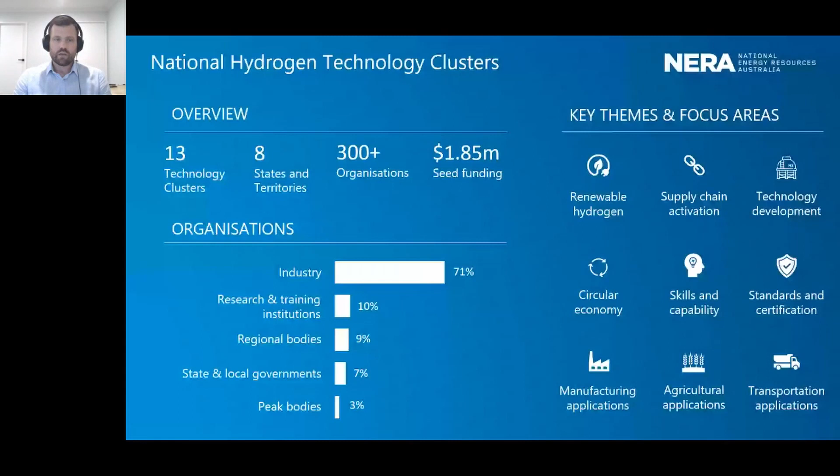So I touched on before some of the people that are here. For people not across the Australian value proposition, you've got Bell Bay right down in the south in Tasmania - fantastic hydro assets there with wind, a great deep port that already has a smelter as a potential off-taker, plus great resources, capability, and training and educational services down in Bell Bay.

Moving up to Victoria, you've got Gippsland, a $500 million blue hydrogen pilot project, which is fantastic and has really been the driver to create the world's first ever liquefied hydrogen vessel. And you keep moving up through Australia - I won't go through all of them, unfortunately don't have enough time today.

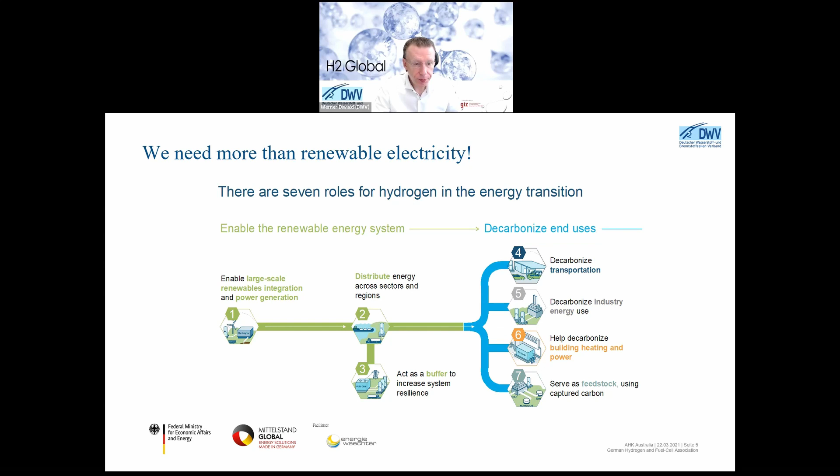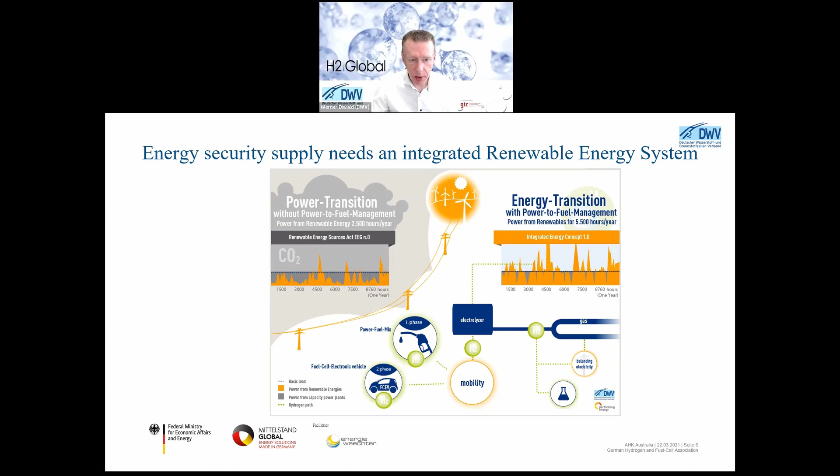It works very easily if we over-install renewable energy production from the electricity side. Then we have very many hours in the year with electricity production directly from renewable energies. We see it on the right side, the integrated energy concept. But on the other side, we have a lot of surplus energy, and we can waste it. We can stop or reduce the turbines and solar production in these hours, or we can use this energy to produce hydrogen, and then transfer it, for example, to the mobility sector and also other industries.

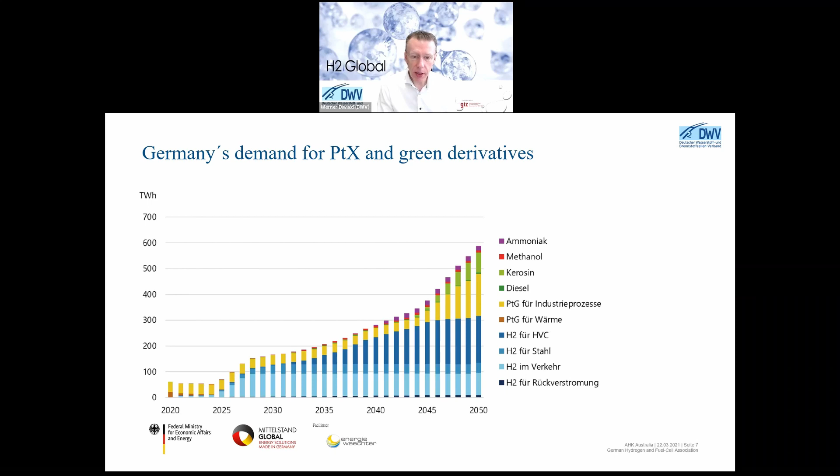I think that was the basic figures, more and more visible and communicated by the industry to the politicians. I think that was really the base for the decision to make a German national hydrogen strategy two years ago. For the political scene, it's not only a small solution to integrate the renewables, it's more the solution to decarbonize our whole energy system over all branches. On the other side, it's a big chance for our economy. So we need a long-term strategy, supported by politics, so that industry actors can act now.

The National Hydrogen Strategy, NWS, Nationale Wasserstoffstrategie, defines the steps necessary to contribute to achieving the climate targets, to create a new value chain for the German economy, and to further develop international energy policy. The government will support this transformation, or market ramp up, with 9 billion euros. And they defined 13 concrete objectives and 38 coordinated measures, which we want to bring to market or realize in the next 10 years.

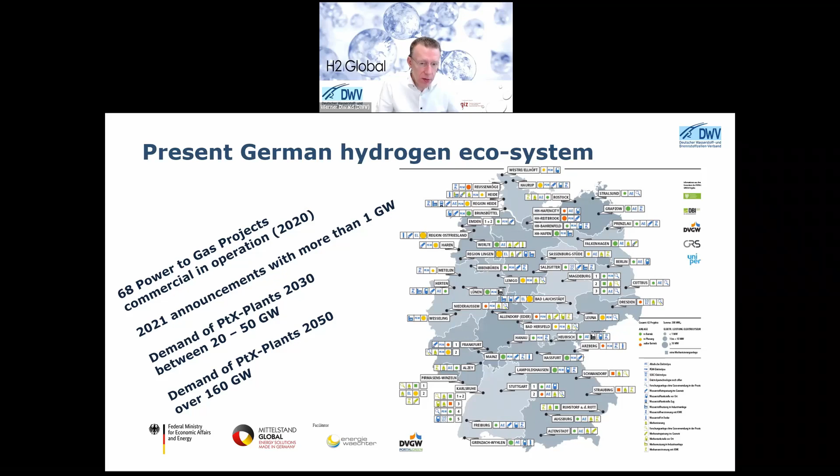Demand for PTX plants in 2030, I mentioned, is a minimum of 20 gigawatts. There are some studies on the market based on realistic numbers that mention 50 gigawatts, and the demand for 2050 for Germany is more than 160 gigawatts. That's only for Germany, and if you take a look at the whole world, it's really an amazing market opportunity for the industry to produce electrolyzers, PTX utilities, and so on.

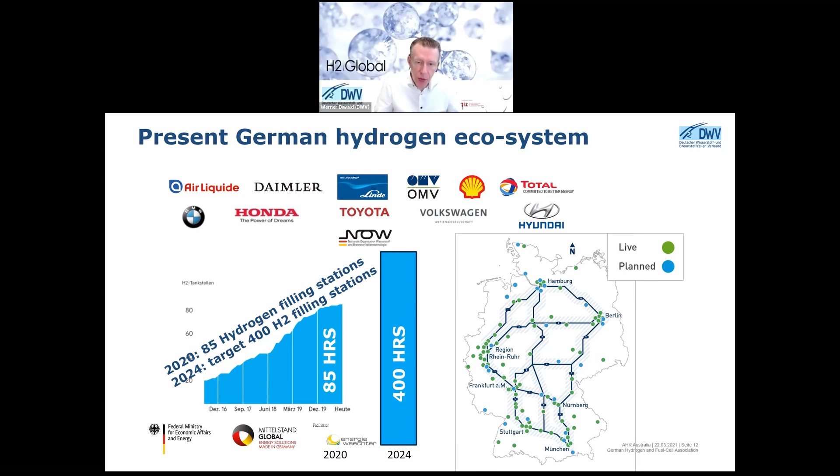Until now we have 85 hydrogen filling stations. The target for 2024 is 400 hydrogen filling stations. With these 85 stations, positioned very intelligently, we already have the possibility to drive a fuel cell car through Germany from east to west, from south to north—no problem. Of course it's not very comfortable at the moment, but it's possible. I think that's the very positive message: it's realistic to drive with hydrogen cars, and soon hydrogen trucks, through Germany without any emissions in the coming years.

You see here over Germany where the mobility station situation is, where the filling stations are, and what we see now is really the concentration on trucks, on heavy duty trucks which operate with hydrogen and fuel cells. I think it's more the market than for passenger cars.

For the first steps, I think it works with battery cars. But if you see long distance running for cars, or heavy duty, it's only really possible with hydrogen. And I think that is a reason why the big truck companies are now really concentrated on hydrogen with the truck business production.

You see buses are produced in Germany also. Toyota delivers a lot of cars to Germany also. So we really see there is a small, but there is a hydrogen fuel cell mobility acting with a lot of people. So, as I mentioned, you see a little bit again here where the projects are placed. It's not concentrated on one area, it's everywhere in Germany.

Everybody has interest to install power-to-gas units, to integrate especially the renewable energies, so wind and PV on one side, and on the other side they see that at the latest in 2030 they need a lot of clean hydrogen to fulfill the climate targets without payments of penalties.

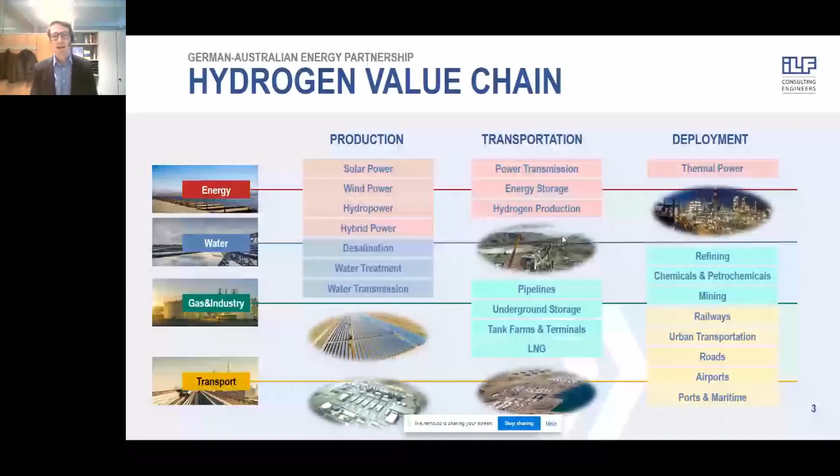Coming to some projects we have worked on and are currently working on: starting with a pilot plant, the sector is still in the pilot plant phase, up to around 10 megawatts, with several facilities operating — Werner mentioned this earlier. So we're working on a 4 megawatt project in Austria, which is currently under construction.

Being commissioned by end of the year. We have significant experience in gas transportation in the past. One example is power to gas, working on a 100 megawatt facility in Germany, and just recently got another order to produce on a 100 megawatt industrial scale, hydrogen, and maybe together with methanation, injecting it into the pipeline system.

So in Europe we discussed this quite intensively: how do the compressor stations react? How can pipelines be converted even to hydrogen pipelines?

A very interesting topic, also for the relationship between Australia and Germany, is the transportation of hydrogen over long distances. We studied this already for the steel industry in Europe, to get hydrogen from the Middle East, a couple of thousand kilometers away. Since we already have an intensive relationship on the energy side between Australia and Germany, we are optimistic there will be ways in the future, already being discussed now, to transport hydrogen from Australia to Germany, for instance.

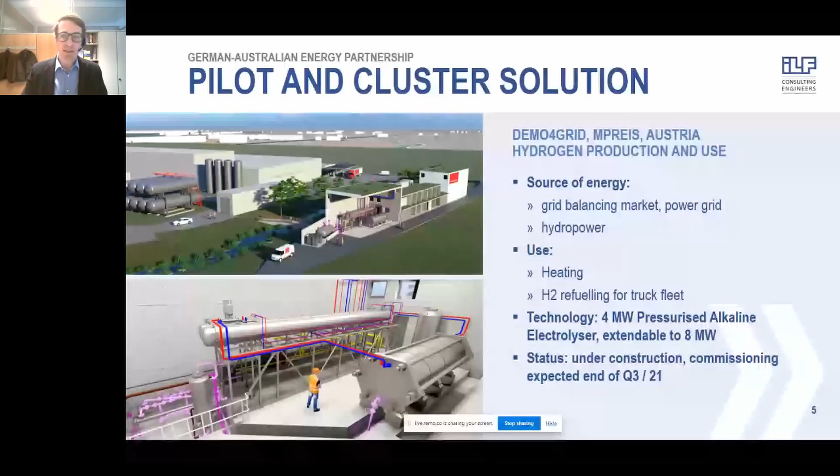I skipped that a little bit, it's just for your information. I will share my presentation right after in the chat if it works, otherwise I can send it to you later, or you will find it as Max mentioned before. So I think that's from my side. Thank you very much for giving me the opportunity to talk to you, and I hope we will together design the energy partnership in future. Thank you very much.

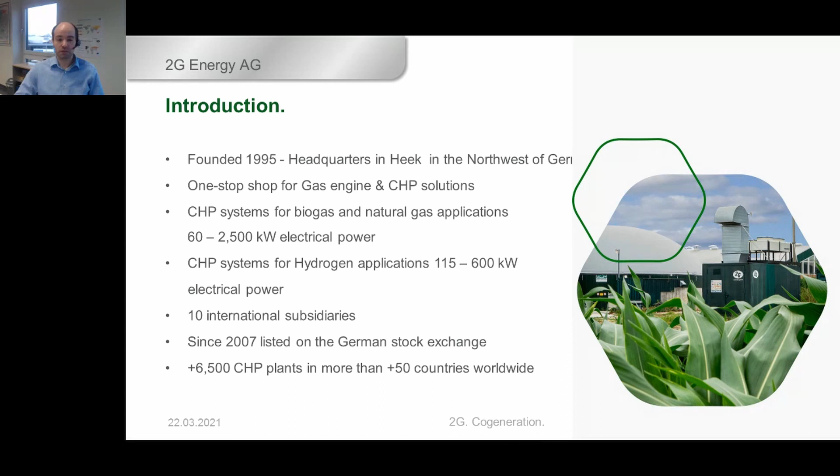Perfect, wonderful. Good morning everyone, or good afternoon to Australia. Nice to meet every one of you. I'll have the brief opportunity to talk about 2G Energy and our hydrogen solutions for gas engine-driven cogeneration applications. A few brief comments about our company: 2G was founded in 1995. Our company headquarters is located in the northwest of Germany, North Rhine-Westphalia. Our company is what we call a one-stop shop for gas engine and CHP applications. Our usual power range goes from 60 kilowatt electrical to 2,500 kilowatt electrical, for biogas and natural gas.

Two years ago, we also introduced our own line of gas engine-based applications for hydrogen operation in the power range between 115 and 600 kilowatt electrical output, with a 750 kilowatt unit just being introduced to the market at the moment, but I'll get to that a little bit later.

2G is a stock-listed company. Back in 2007, we went public on the Frankfurt Stock Exchange in Germany. Nowadays we're almost 700 employees in the company, with last year's turnover roughly being 250 million euro. Up till this date, 2G has supplied roughly 6,500 cogeneration systems on various gas types to more than 50 countries, including Australia, but about that I'll get to it in a minute.

So 2G, in its core, we are a CHP system and engine manufacturer with our own manufacturing facilities and also our own R&D division, which we believe sets us apart a little bit from other players in the field, because our company is fully dedicated to these application types, also for various gas types, such as natural gas, biogas, propane, and of course hydrogen, with our own engine series from 60 kilowatt up to 1 megawatt. What I mean with R&D is really not modifying existing engine technologies, not retrofitting other brands or manufacturers. What we're talking about is 100% genuine OEM capability in this segment.

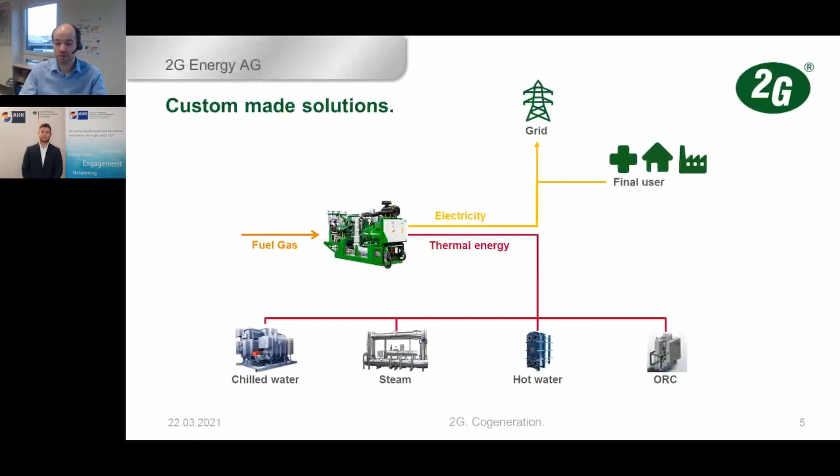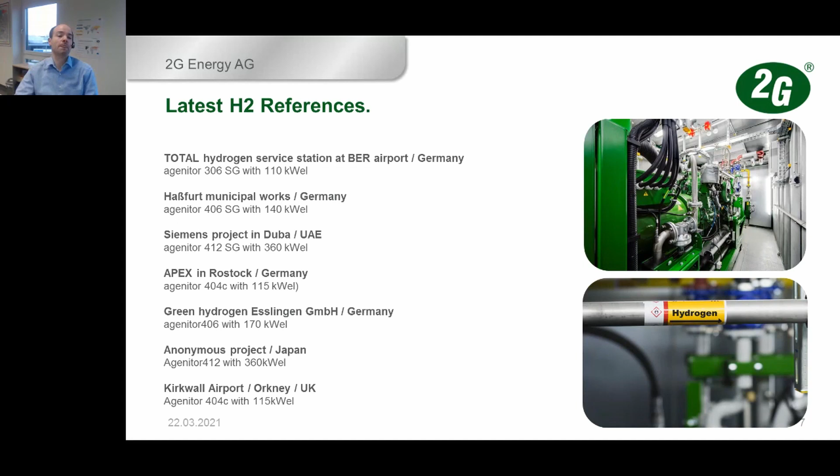So 2G in Australia, very briefly. 2G is active with a local partner in Australia since 2014 already. By the end of 2020, 24 units have already been installed or are still currently in transport.

The customer range we were able to supply systems to include the agricultural sector, public municipalities, aquatic centers, F&B companies, landfills, and commercial buildings. So it was a large range of customers. To give you an idea, the smallest unit so far installed was 150 kilowatt electrical, the largest being 2.5 megawatt at the moment. And it's a wide mix of customers and segments.

They're installed more or less all over what I would call the eastern part of Australia, so Queensland, New South Wales, Victoria, and also South Australia. And the service is being taken care of for all of these units. Regular service and maintenance is of course needed, as you can imagine, by our local partner called Evo Energy Technologies. Their head office is situated in Brisbane, but they also have locations in Sydney and Melbourne.

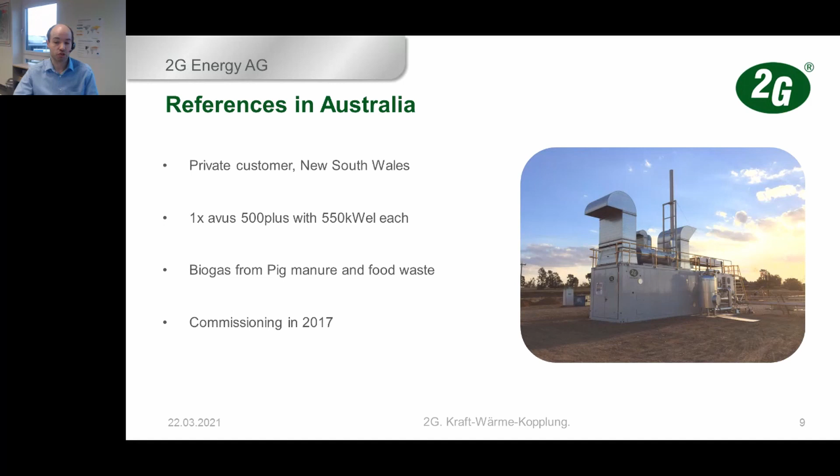To give you a few ideas how it looks like, usually 2G supplies their system in a containerized setup like you see here. That's a location in New South Wales for a classical agricultural project with a 550 kilowatt unit where biogas was generated from pig manure and food waste. The commissioning was back in 2017. This engine has nowadays an availability over the entire lifetime of roughly 97%. So with this one, we're at 8,100 to 8,200 operating hours, which shows that it works quite reliably, also in an Australian condition.

That's another one for a sewage plant for a public utility, South East Water in that sense. 2 times 360 kilowatt installed. Commissioning in 2019, and this one is actually equipped with a gas blending system as well, where we currently mix sewage gas with natural gas to achieve full output the entire time in case the sewage gas production is fluctuating. And in the same manner, theoretically, instead of natural gas, also hydrogen could be used at this site to blend in the appropriate amount to use, on the one hand, the entire sewage gas that is produced, and on the other hand, have the engines operating on full load the entire time.

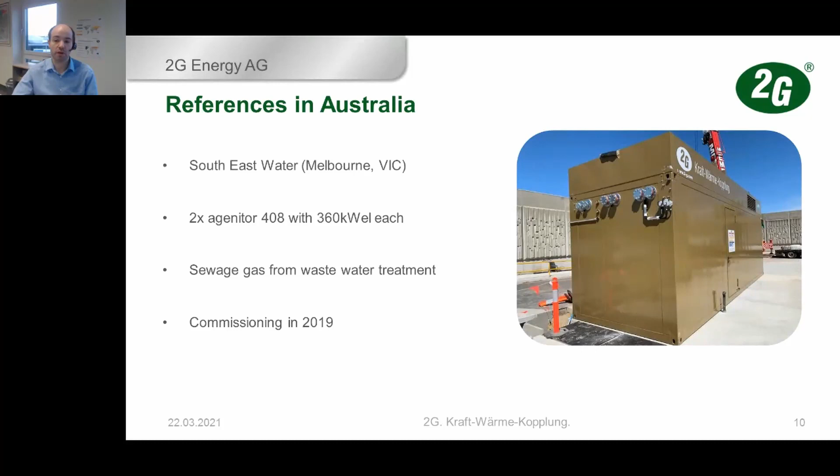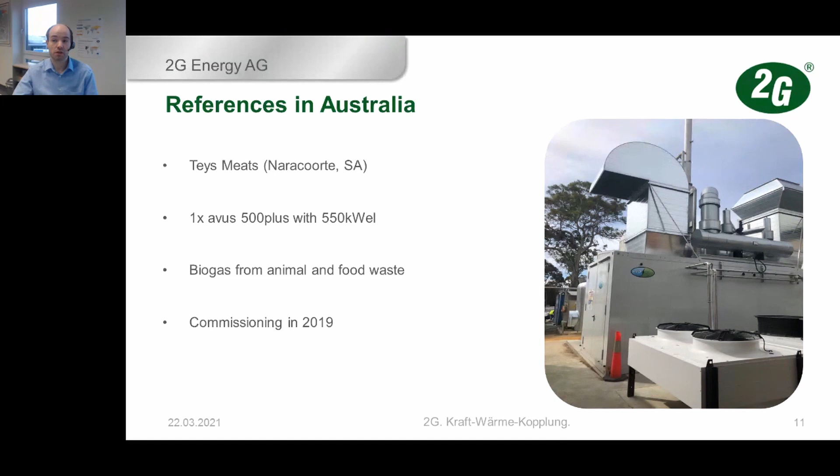Last one, this is again a biogas one, also 550 kilowatt, also commissioned in 2019. This was installed at Teys Meats in Naracoorte in South Australia, and also they have a gas blending system installed. So also there, with a retrofit kit if required, it's theoretically possible to also operate these units on hydrogen additionally or as a 100% substitute fuel.

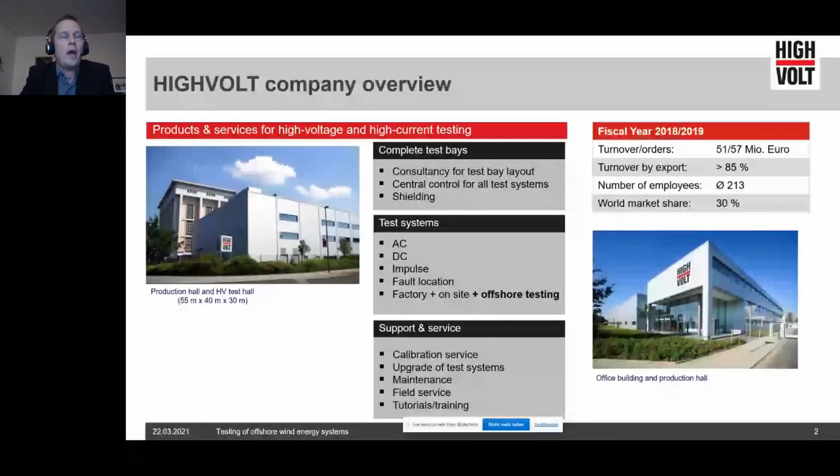So if you look at such an offshore wind farm, you have obviously the individual windmills, then you have a collector station, and between the collector station and the individual windmills you have the so-called inter-array cables. Then from the collector station to the shore, the export cable. It is known very well that these cables can be subjected to failures, and these failures mainly come from installation. So it's necessary and important to test such cables after installation, and maybe also while the wind farm is under maintenance - you should test the cable every year or every second year, just to make sure the cables are still in good health and do what they are supposed to do: bring the energy from the wind farm to the shore, so the green energy can be used for households or for generation of hydrogen.

So what we have done together with industrial partners in the last 1 or 2 years, we have developed a portable on-site testing system for such array cables. The cables have to be tested according to the latest IEC standard with a test voltage of 72 kilovolts, and it is essential that you bring test equipment to that platform - or at a later stage, and that's also a discussion currently going on, that you have such a test system installed permanently.

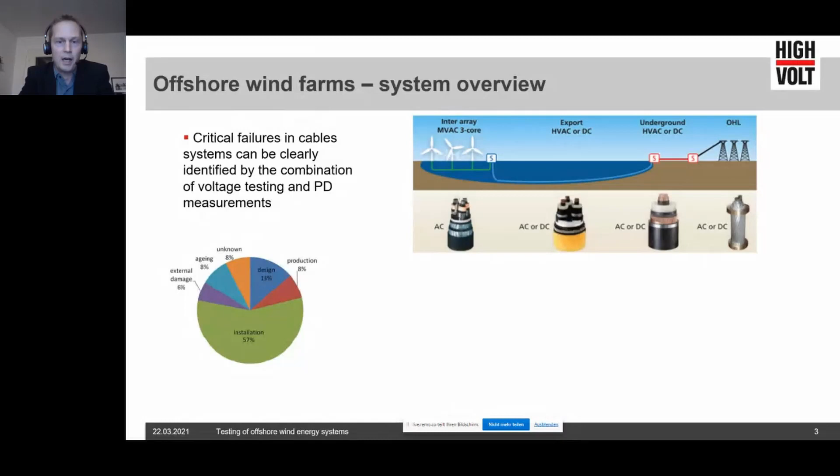The biggest challenges for such equipment are that you have to transport them via vessel under sometimes harsh conditions, and you have to install them on the platform, exposed to harsh sea conditions as well - meaning wind, meaning the sea climate with salt in the air and so on. So you need to take care of things like the painting, the transportation stability, and such equipment has to be certified by companies like DNV, and you have to agree with the operators of the platforms.

That's also an important point for the maximum lifting capability of their cranes. That also makes it necessary to have it modular, because for several projects at the moment, the maximum lifting capability is only 3.7 tons per individual item. That's why a modular system, which can easily be upgraded for the needs - especially for the maximum length of the cables to be tested - the system can be amended with the necessary equipment to perform also partial discharge measurement on the cables, and especially here on the terminations and the joints in between.

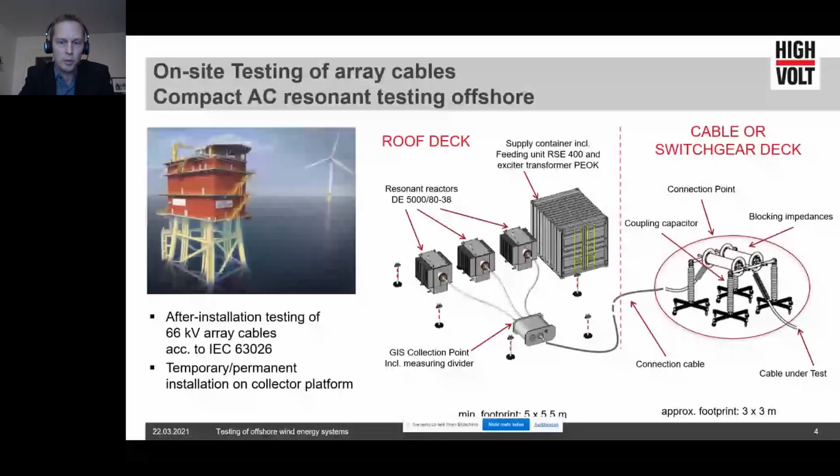A next important item of such a wind farm is the export cable. Such a cable can have a length of several tens up to a hundred kilometers and more. Especially with submarine cables, we are exposed to harsh environmental conditions, but it can also be that a vessel just drops its anchor and destroys the cable. So it is essential to find a failure in the cable as soon as possible and start the repair work quickly, because if a cable is broken, you cannot transfer energy from the wind farm to shore, and everyone is losing money.

So there is a system in place which helps you find the failure at the time the breakdown occurs. What you need from the cable is its length and propagation velocity, either from the manufacturer's data or by performing a reference shot to get a fingerprint. You install sensitive voltage sensors and digital impulse analyzers at both ends of the cable. When a breakdown happens, these sensors decouple the data, and based on the length and propagation velocity, the fault distance is calculated within minutes. Combined with knowledge of joint locations and GPS data on vessel movements, you can get a pretty close idea of where the fault is and start repair work as soon as possible.

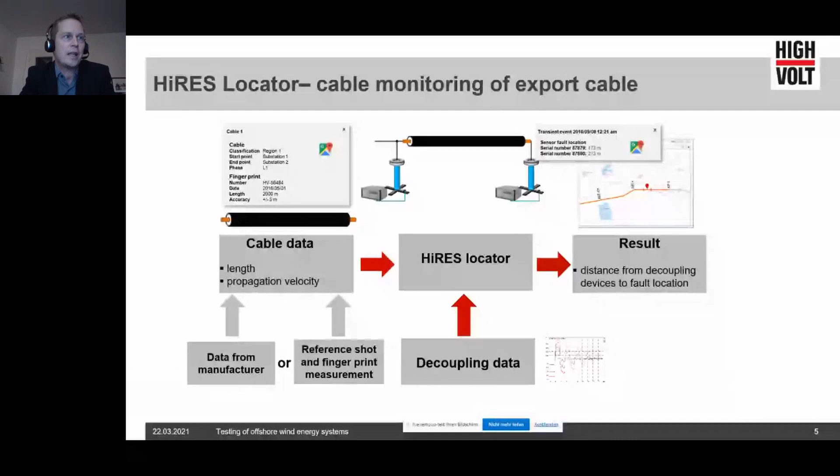To give you an idea of how it works and how accurate it is - this example is from a land cable, because you normally don't get many cable failures, and you don't get access to failed cable systems right away. So we took the chance to demonstrate the capability of such a system on an 8.2 kilometer cable system in Bangkok.

That cable system had failed during on-site commissioning with damped AC regularly, but no one could really determine the breakdown location with traditional methods. So we got the chance afterwards to use our system. We installed the sensors, did the fingerprint measurement, then applied high voltage, and the breakdown was detected at a position 6.4 kilometers from one end. That measured fault location was matched with the installation plan, and it turned out that exactly at that position there was a cable joint. That joint was later opened, and it was found that there really was a problem in that joint.

We have also done measurements on cable lengths up to 400 kilometers, though not on cable systems with an actual fault. Instead, we installed a small spark gap at one end to simulate the failure at the far end of the cable, and we could still detect that fault with the exact distance.

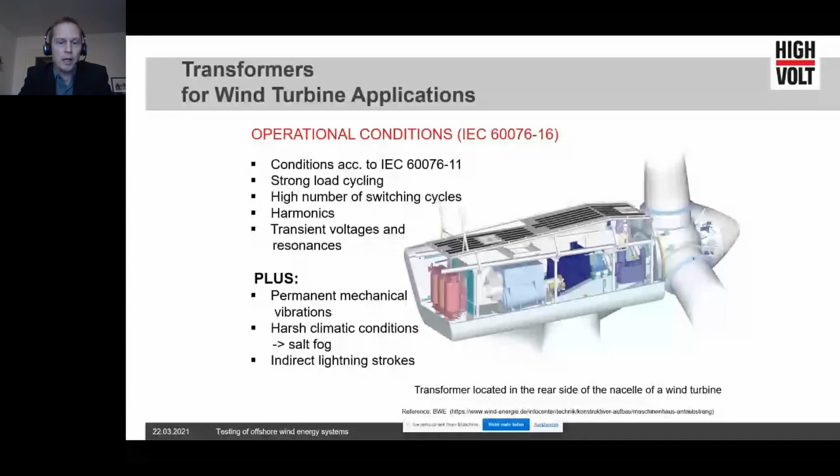So it becomes necessary to test the transformers from time to time to check their performance and confirm they are still in good health. Here again, a modular system is available, consisting of a static frequency converter with 200 Hertz output voltage, a small step-up transformer, HV filters, and voltage measurement. This allows you to go up to the nacelle, connect the system to the transformer, and perform the tests needed to check its condition. The system can be extended further with small coupling capacitors and PD measurement to get even more information about the health of the transformer.

And all the systems I have just shown are not only for offshore wind farms, but we can also use for, like this one, for any distribution transformer, or the resonance system shown before can also be used for any medium voltage cable you have in your network.

In summary, yes, we are highly experienced in high voltage testing over decades. We have, as I said, all the necessary equipment, especially for factory testing, on-site testing, and offshore testing.

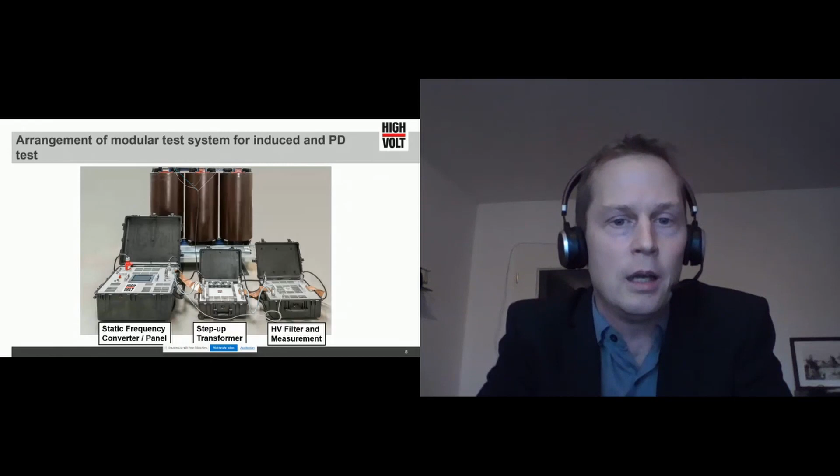The system for the 66 kV offshore cable or array cable application is according to international standards. We have first experience with JDR cable in the UK for a project with Ørsted in the North Sea.

As I said, it can also be used for testing of any medium voltage onshore cable. The fault location system is very precise and gives you immediately the location of the breakdown of your cable, and it can monitor several hundred kilometers of cable.

And the test system for testing transformers of wind turbine applications is portable and easy to use. Again, weight has been an issue because the crane that goes up to the turbine only has limited lifting capability. The system can be used for the induced voltage test and for PD measurement.

And as I said, it can also be used to test distribution transformers up to 10 MVA. And that would be the end of my presentation.

Thank you, Mario. Pleasure. Yeah, thank you, Mario, for those insights. Great to look not only at the hydrogen production itself, but also at the whole value chain.

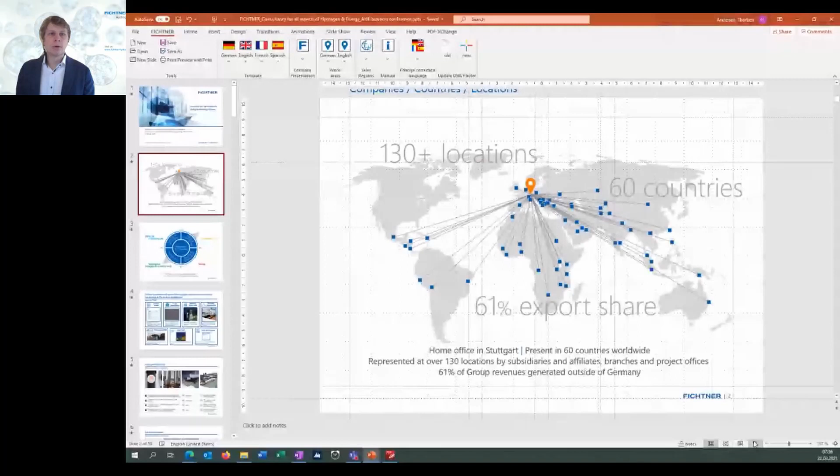All right, thank you, Max. So hello, everybody. A very quick introduction about Fichtner. We are an internationally active engineering consultancy.

We have a track record in Australia for more than 20 years now. We started with big desalination plants in the early 2000s, and have also covered renewable energy projects and are now especially active in the growing waste to energy sector, where we also have permanent staff based on the East Coast. We are at the moment in the process of setting up an office in Sydney, especially for the purpose of delivering hydrogen services.

Fichtner is active in four business sectors: water infrastructure, consulting and IT, and especially energy and renewable energies and environment. Within our energy sector, we cover, for example, power transmission, gas networks, large storage projects, as well as conventional power plants. And obviously in the renewable energy sectors, we cover large renewable power plants, environmental permitting, and all related services for those projects. We deliver projects at a very early stage, for example for master plans or pre-feasibility studies, continuing through all project phases until the construction of projects and also the commissioning.

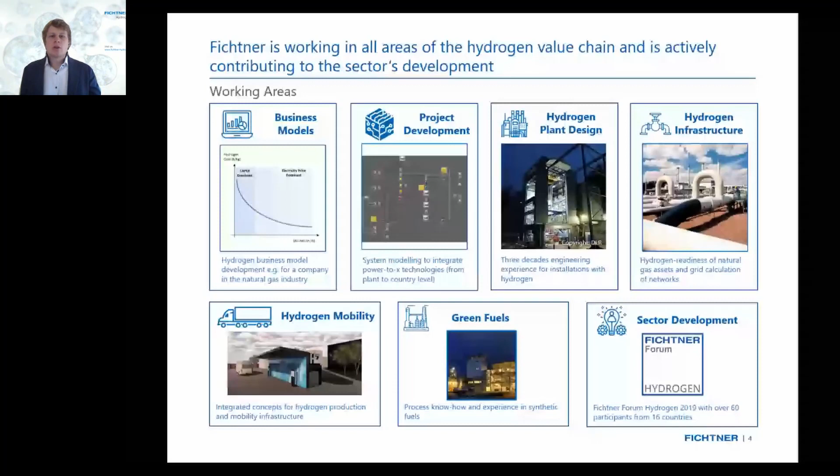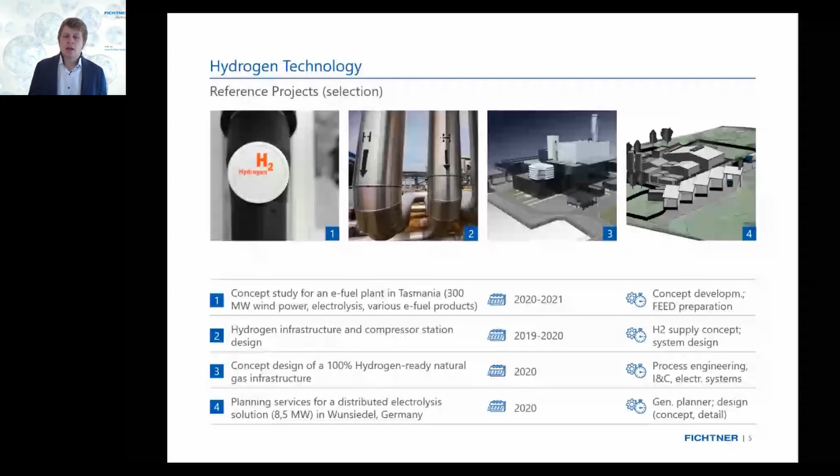Just to give you a short idea about what we are doing besides hydrogen, like I said before, we are very active in the renewable sector. We have been the owner's engineer for a very large photovoltaic power project in the United Arab Emirates, with a maximum power peak of almost 1.2 gigawatts. We are also a technical consultant for the tendering of a very large wind power project in Saudi Arabia with about 1.5 gigawatts of power.

I will also share this presentation at the end of my short presentation. In the backup, there will be some more project references for hydrogen projects, but also some slides on our whole portfolio. So if you want to take the time and have a look at it, you're welcome. I will be also available now in the session, in the break, for any questions and discussions. So thank you very much for your time.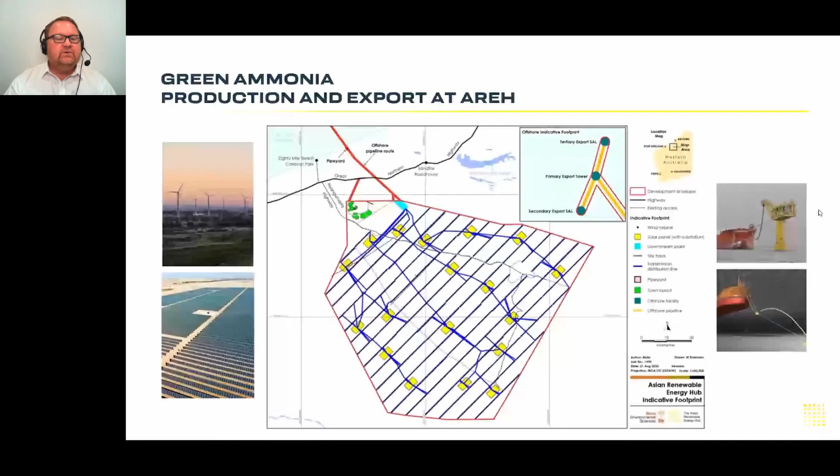Just by the numbers - we've been doing this for a long time now, we started development over 6 years ago. In 2019, we worked very closely with ThyssenKrupp from Germany, who I'm sure you'd all know, on a very interesting process to optimize all of this infrastructure and choose how to lay it out and operate it in the most efficient way. On our side, the current optimum mix is 16 gigawatts of wind generation with 10 gigawatts of solar generation - so more wind than solar, but every site will be different.

This combination will generate around 98 terawatt hours per year and feed that into ultimately 14 gigawatts of electrolyzers. That would produce almost about 1.75 million tons of green hydrogen per year, and if all of that is turned into ammonia, it's almost 10 million tons of green ammonia per year. So it's obviously a very big project - I mentioned before, it's renewables at oil and gas scale.

Indicative capital cost is around 36 billion. The best way to conceptualize it is like a big LNG precinct, such as we have in Northern Australia.

Many of you would be aware of the markets for hydrogen and also specifically ammonia. In our part of the world, Japan in particular is pioneering a lot of work to co-fire ammonia in coal-fired power stations initially, and then in gas turbines. There's been a lot of R&D, which is now hitting the ground and starting to be applied. And if it's successful, it could be adopted at a large scale in Asia.

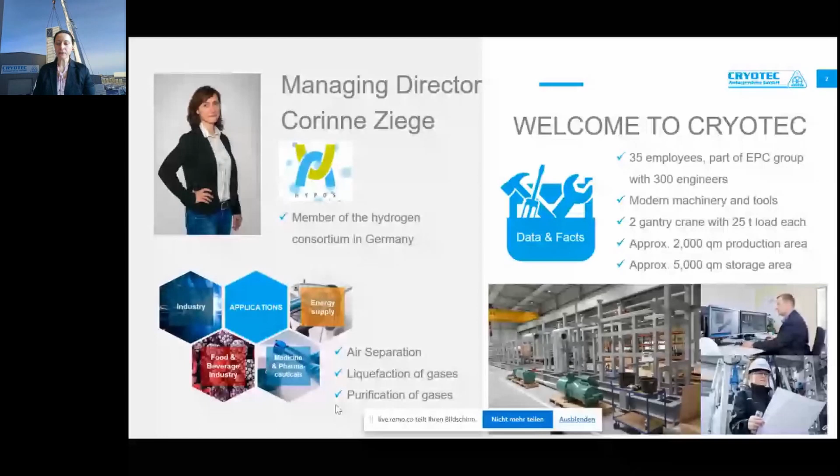Looking at the supply chain of hydrogen, together with EPC Group as our shareholder company, we could handle the full value chain of hydrogen. Cryotec itself is interested in manufacturing tailor-made plant solutions specialized for clients and projects, and because of these tailor-made solutions, they are then most efficient. Looking at the full value chain together with EPC, we could handle the full concept investigation, like feasibility studies, and look at all the special safety issues.

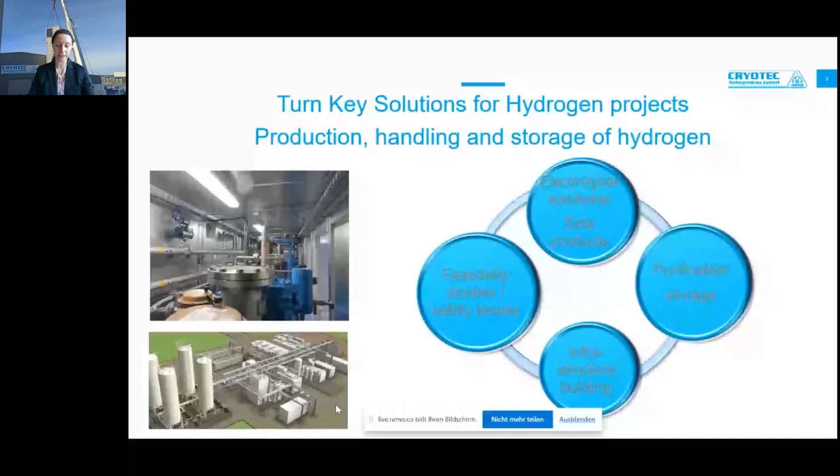From Cryotec's point of view, we are more interested in electrolyzer solutions, purification of hydrogen, as well as storage. Storage and handling of hydrogen, as mentioned before in the talks we already heard, is an important part of the full value chain, as it is directly connected to efficiency and safety.

Looking at some references, as told before, we are a plant manufacturer specialized in skid-mounted and containerized solutions. We are already dealing with plants for hydrogen, oxygen, nitrogen, and argon. So if we talk about electrolyzer solutions, there's the opportunity to produce hydrogen and oxygen in parallel. So the step is very small for us to develop containerized electrolyzer units looking at the hydrogen and, for example, also the oxygen components.

Due to the confidentiality of our hydrogen customers, unfortunately we are not allowed to share these photos with you. So that's why I keep our presentation simple.

At Cryotec, we are focused on doing small-scale, small projects up to mid-sized projects. Our focus is on delivering high quality to fulfill our customer needs, and the projects are completely manufactured, made in Germany. Here you can see another project we have done. For example, this picture shows a small-scale LNG plant which we have delivered to Gazprom in Russia. As you see, this project is completely pre-manufactured and containerized.

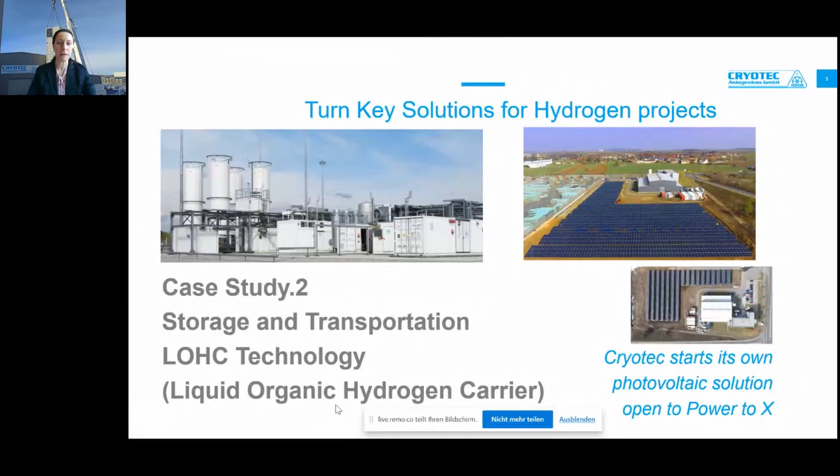So our advantage is that the plants themselves are already pre-manufactured and pre-tested, so the plants can be, let's say, commissioned and started up just by remote access here from Germany, which makes it very easy to get the plant started and running.

We are also dealing with some biogas treatments to biomethane or bio-LNG. And in the past, air separation units with the production of nitrogen, oxygen, and argon have been our main focus. So hopefully we have the opportunity to grow the business of hydrogen together.

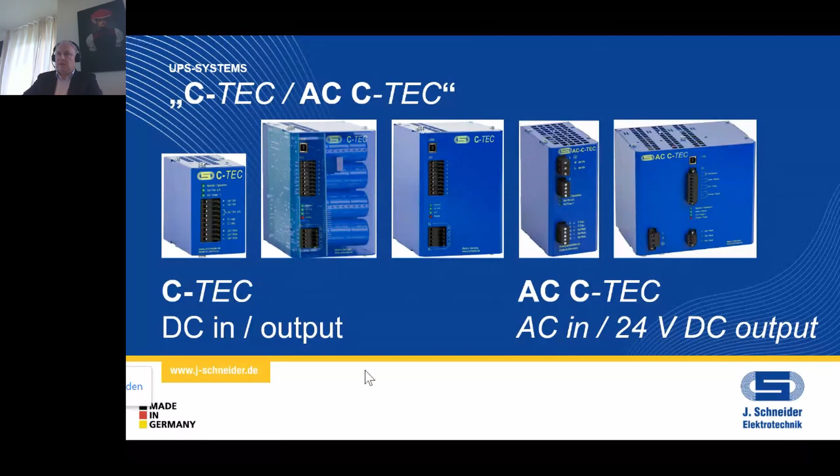Typically, you use them for short-term interruptions. These UPS systems are online UPS systems. This is a unique selling point - there is only J.Schneider worldwide, the only company who provides DC UPS systems as an online system. Not AC, I'm talking about DC. These units operate with integrated ultracapacitors as an energy storage, not with an electrolyte capacitor.

They provide nominal input voltages and nominal output voltages. Buffer time you can extend with additional capacitor modules. Very important is long life maintenance - they are long life maintenance free, even under high ambient temperature. You can use these units from -40 degrees Celsius up to 60 degrees Celsius.

After discharging, recharging is very fast, not like batteries. Capacitors you can charge within seconds or minutes, and we offer them in a compact housing for DIN-rail installation. You have no gas generation, therefore you can use them in a hermetic sealed housing. This is possible, for example, for ATEX applications.

On the other hand, we produce our AKKUTEC series. These are battery-based UPS systems, which are online systems as well - which is also a unique selling point. You can run them in a master-slave operation to increase the power or increase system reliability. You can have a redundant system. Nominal input and output voltages are available.

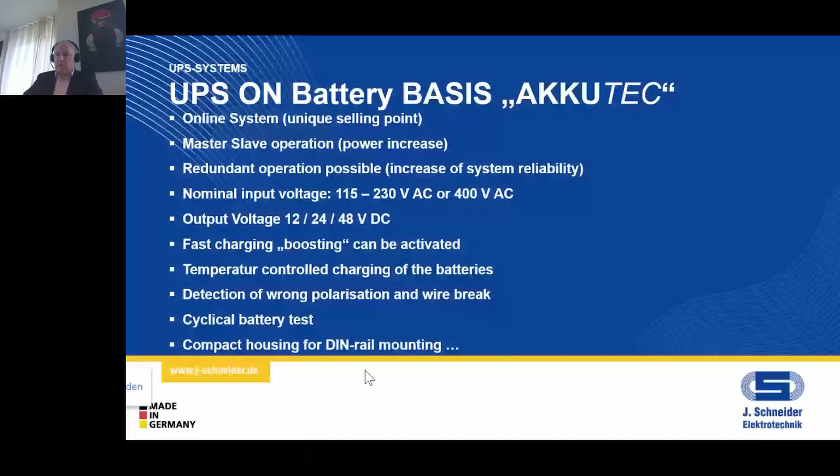Here you can see the online function. The battery is connected to the output in parallel. That means when the mains fails, the consumer is supplied by energy immediately. There is exactly no interruption.

And this, for example, is a system which is an offline system. Here you have a switch. When the power fails, you have a small short gap - you have a small gap here when you have a power failure.

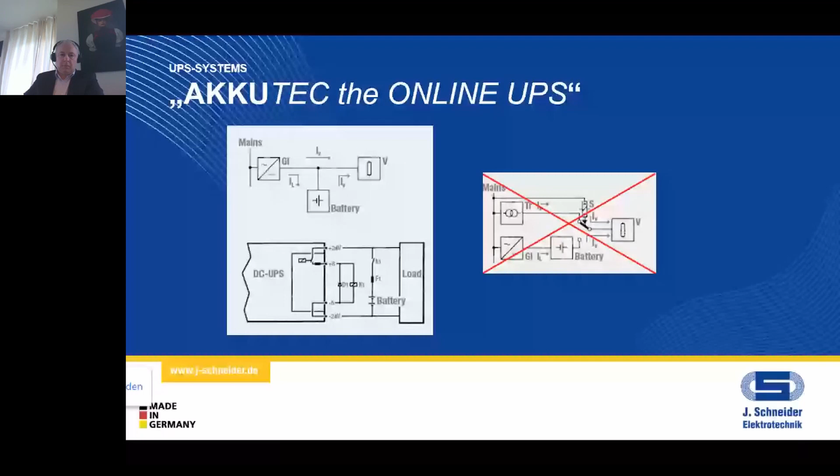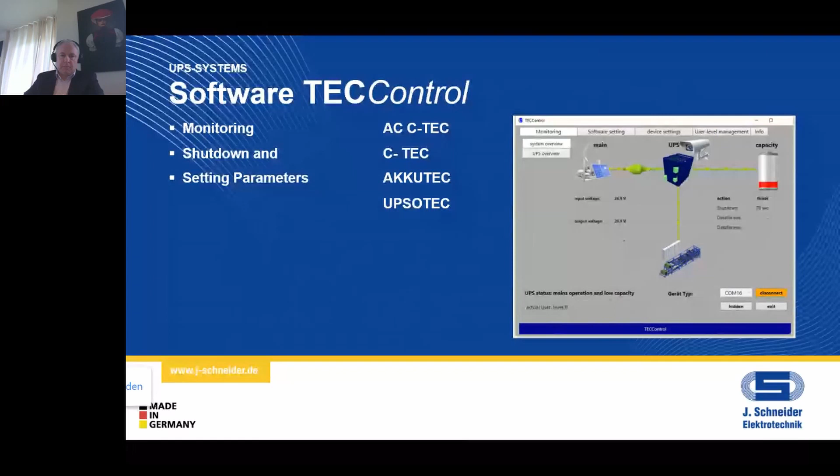Okay, along the AKKUTEC and C-TEC units, we offer software for monitoring, shutdown, and setting parameters for the simple units. And we have VDS certified UPS systems for fire alarm systems or emergency exits. There we have a special software where you can measure as well the internal resistance of the battery.

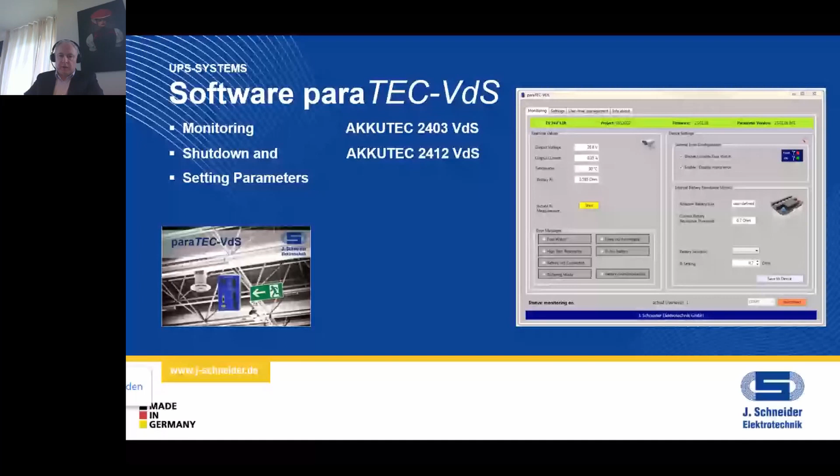Typical applications: the best power quality analyzers are useless when they have no auxiliary power. In case of a power failure, they cannot record when the power is coming back. You cannot see transients, events, and such things.

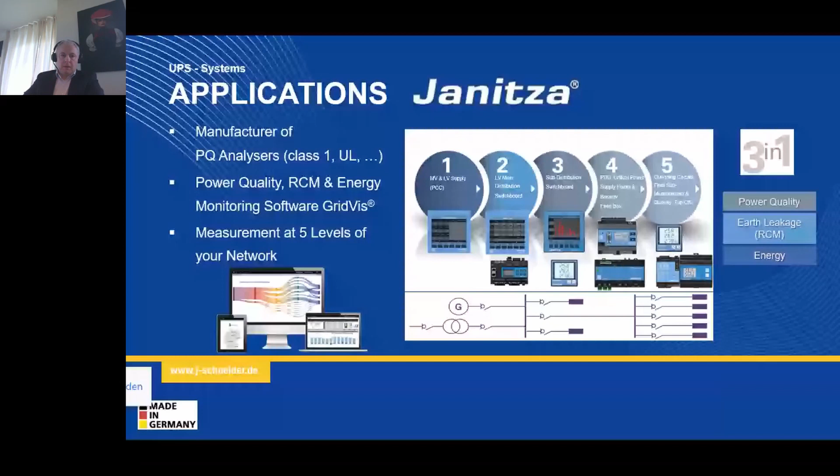For wind turbines, we manufacture transformers and reactors. But beside these two products, we deliver as well for the wind turbine industry UPS systems for lightning protection, echo sounding for offshore wind turbines, radar for the planes, and pitching systems for the blades to bring them into the wind or out of the wind. So here we supply the charger for the capacitors and the capacitors itself.

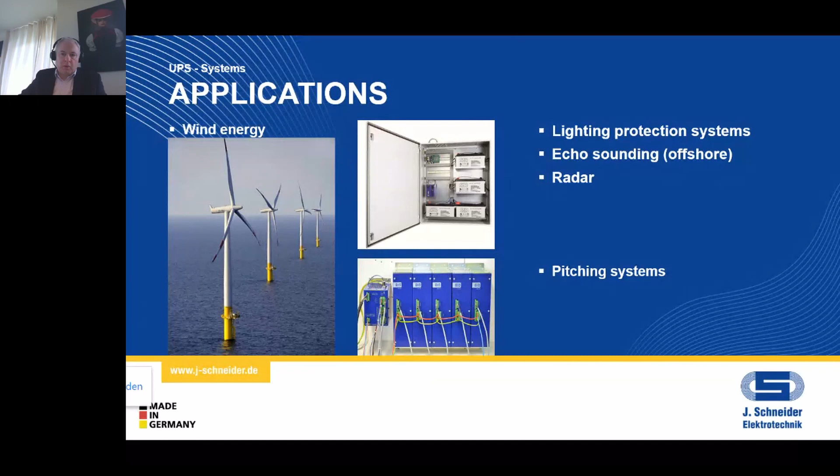A typical application where we are very active is the photovoltaic industry. We offer transformers and reactors, and we have as well the auxiliary power with our C-TEC unit for the inverter.

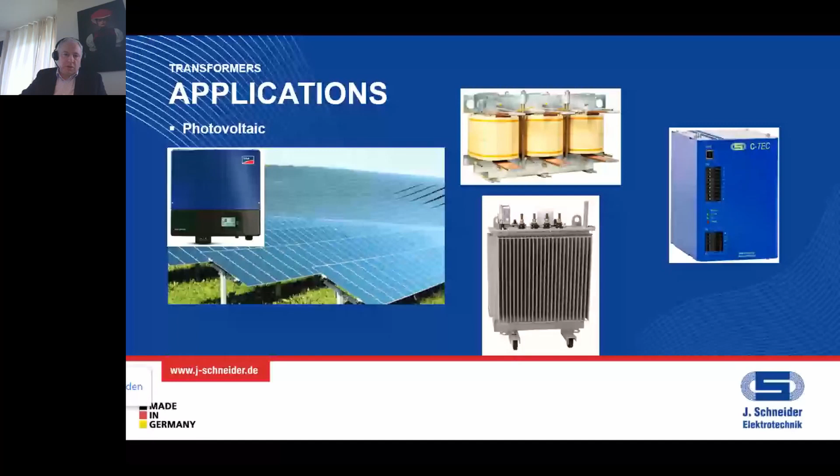Typical application can also be an elevator system. Here we have supplied ThyssenKrupp in London for a building called Scalpel. They have 27 elevators, 170 meters high, 11 shafts, and they are using DC UPS systems for communication in emergency cases, ventilation units or fans, and 17-inch screens.

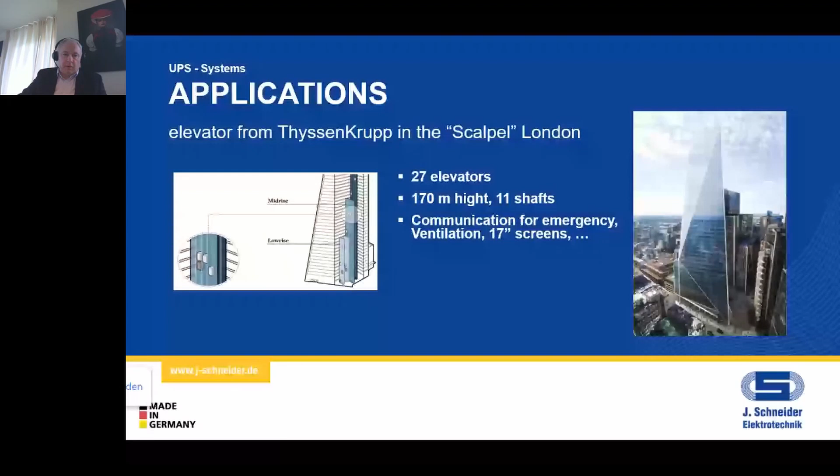Typical application can also be aggressive air environments, when you have PLCs or variable speed drives in such environments. Then you can use our product, because our boards, our PCBs, are coated.

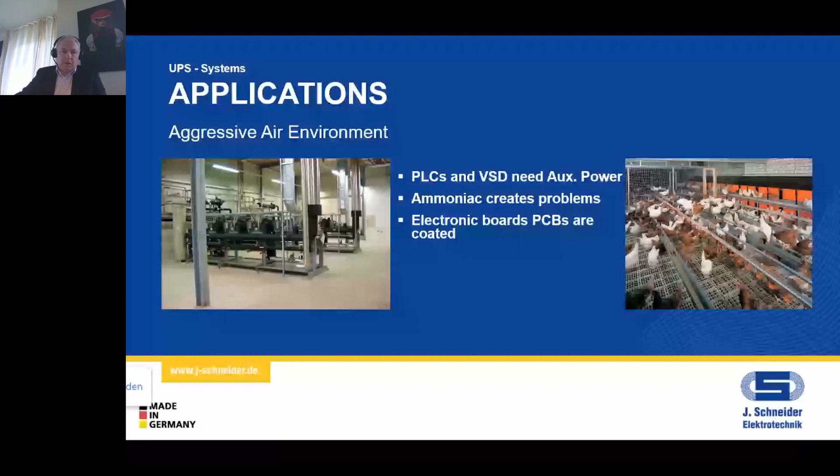Electronic locking systems: during a power failure, customers still need to access their lockers.

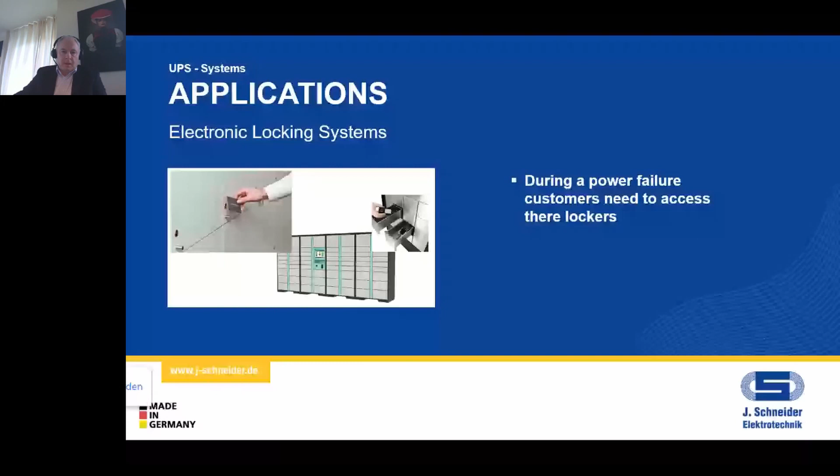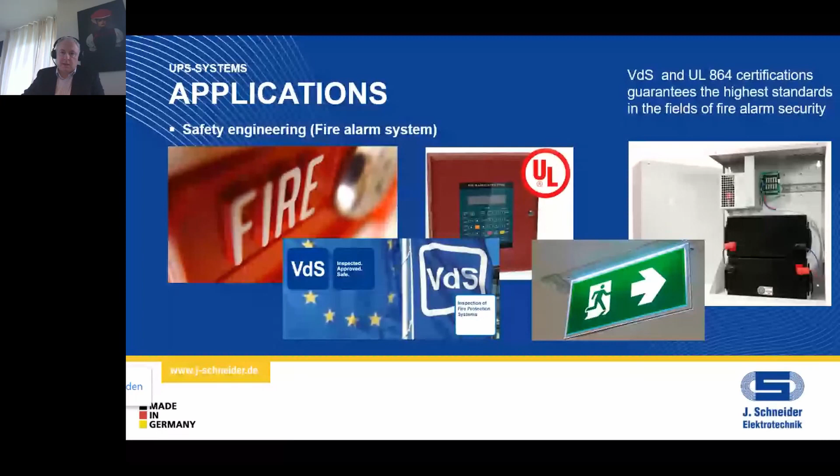We are very active in safety engineering, especially for public buildings. We supply fire alarm systems, emergency exits, door holders, magnetic door holders, door access, and so on, with AKKUTEC units. These units are certified according to VdS and UL 864, which is the highest standard for alarm systems. Very special, very typical application.

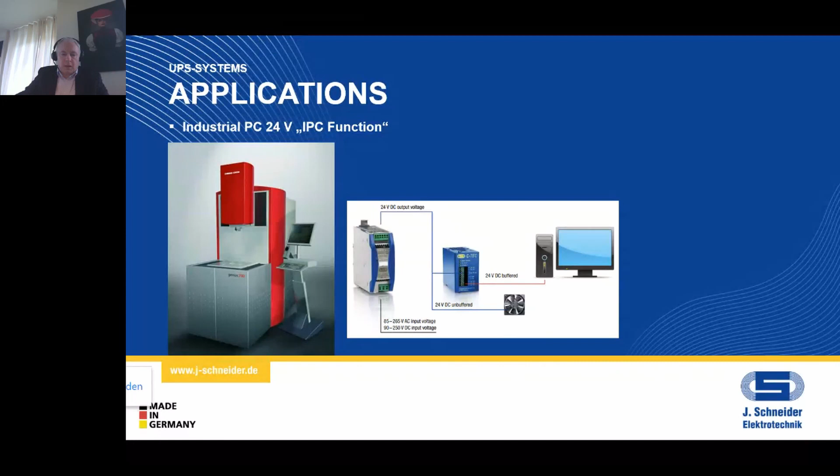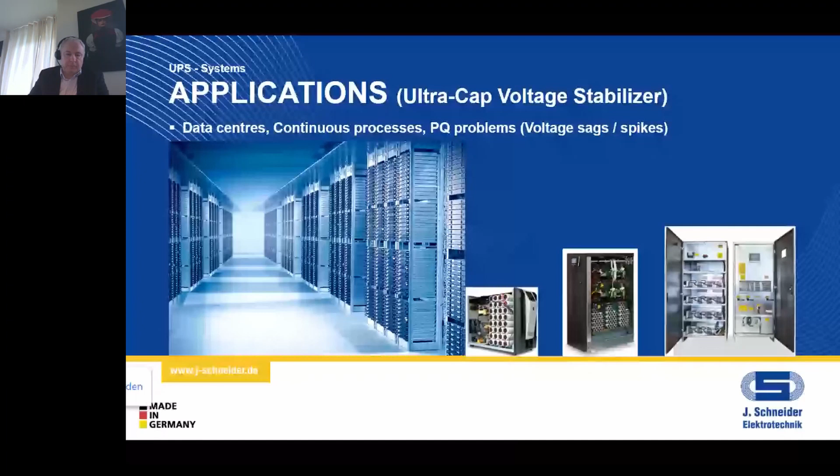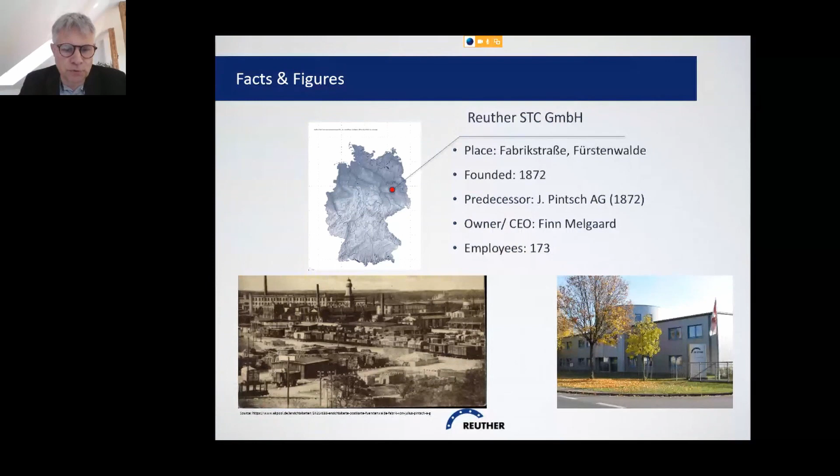You can see there, the owner is Mr. Finn Melgaard, the CEO, who is from Denmark. This company currently has approximately 180 employees, and we produce storage tanks.

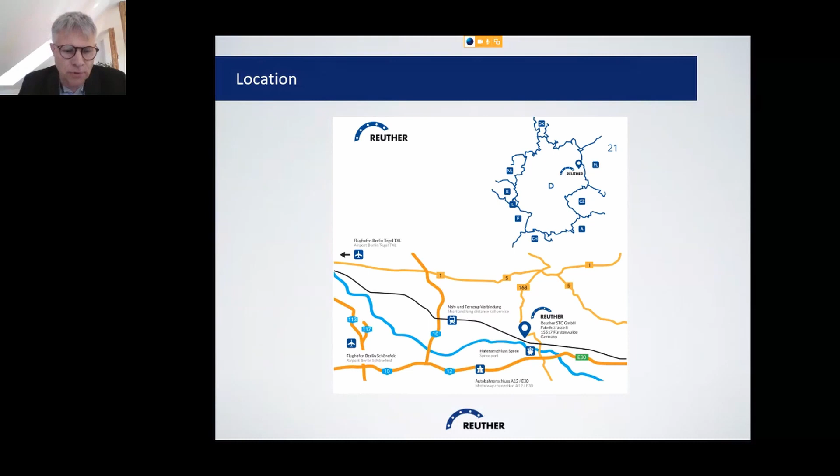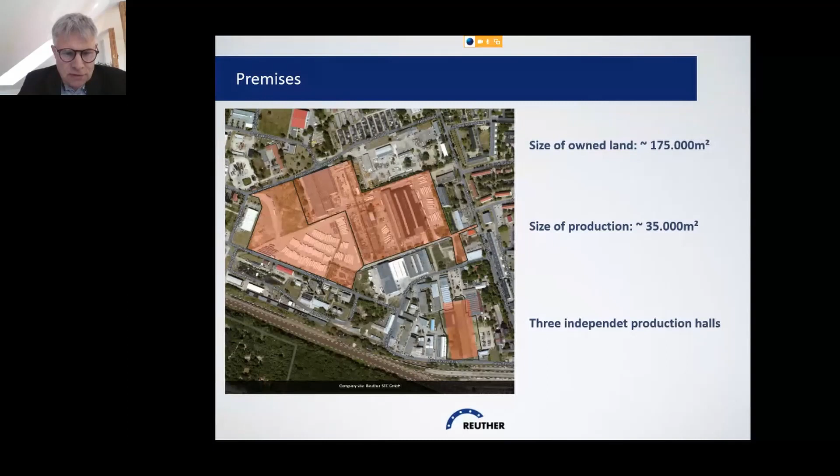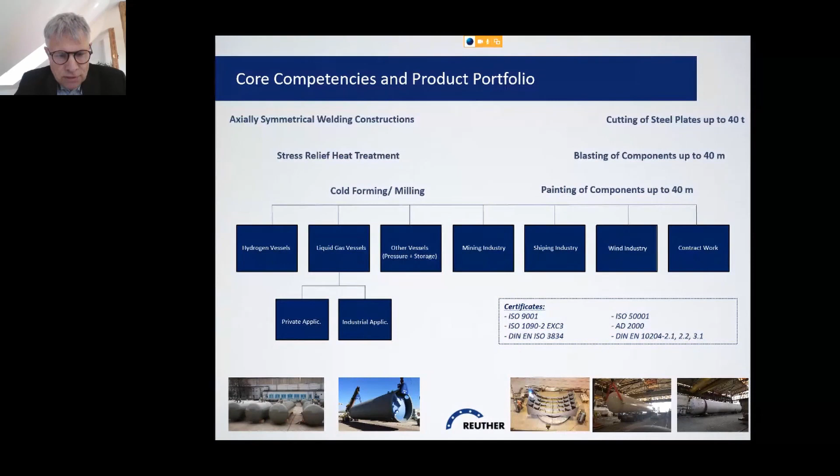And we have a big industrial area to produce storage tanks. That means we have 175,000 square meters to produce storage tanks. It's not only that we are producing storage tanks for hydrogen. A main product we are looking to establish in Australia is the hydrogen production, the production of hydrogen storage tanks up to 350 bar.

Some of the speakers were talking about storing hydrogen, that storage is a very important thing. We also think so. At this time, the efficiency of some electrolyzers and other parts is not optimum. But why don't we store the hydrogen from electrolyzers with not such high efficiency this moment? Because hydrogen is the same like coal in the ground and oil in the ground. If you put it into a stock, if you have the storage, then you can use it in the future. We think it's important to have storage tanks to store hydrogen, and then you have the possibility to change different equipment to get better efficiency.

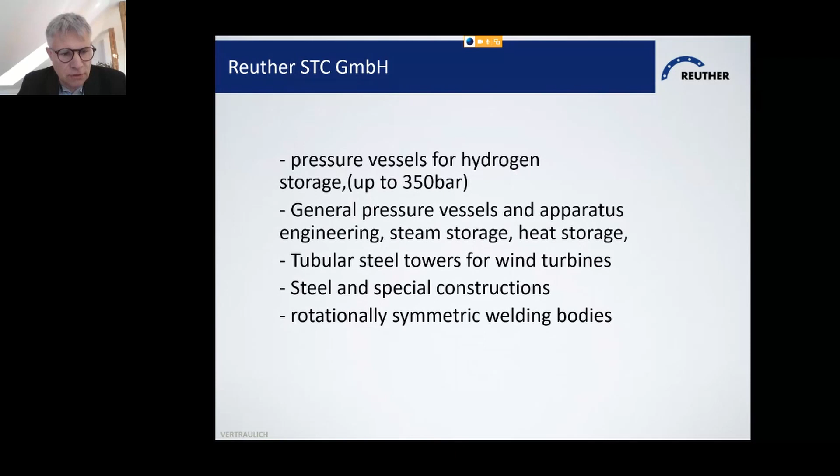Turbine steel towers are also part of the products we have been producing in Fürstenwalde for a long time. Since 1995 we produced towers for wind generators. That was when this business started, and our customers like Nordex, Enercon, and Vensys, and a lot of global big players are using the steel towers from Reuther Fürstenwalde.

We can produce in our company equipment, especially storage tanks with a volume of 1 cubic meter up to 250 cubic meters maximum, a diameter of 6.5 meters and a length of 40 meters, and we can handle products with a weight of 100 tons. That means we can produce big storage tanks, and together with a pressure of 350 bar, we can store a lot of hydrogen inside the storage tanks.

But you have to know, if the pressure goes higher and higher, you have to find the optimum between the weight of the storage tank and the weight of the medium inside it, because then you have a big difference. If you have very high pressure, you need a much bigger thickness for the storage tank, meaning its weight becomes much higher than the hydrogen inside. So we help our customers optimize the storage tank dimensions and the weight of the hydrogen inside.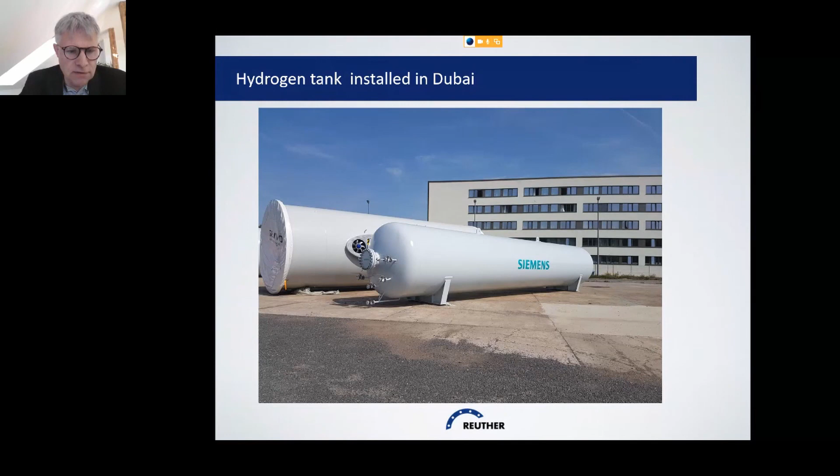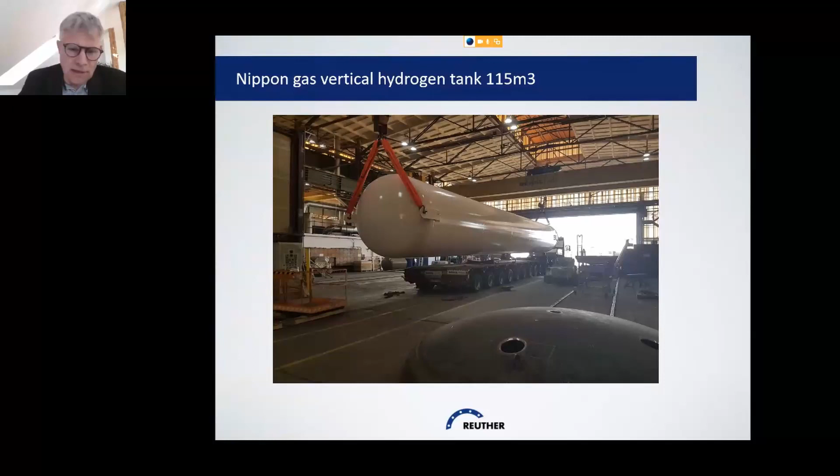And there you can see the next tank. At this moment we have produced this tank, that's a very new picture I've made. Then the last picture shows the tank we have in manufacturing at this moment. That means we produce a lot of storage tanks currently, and I hope we can also do this for Australia.

Something about storage tanks - normally people say, okay, it's a simple thing. No, it isn't. You have no chance to make a reset. Oh, there was a mistake, let me reset it - no. If you make a mistake, you can never use that material again. If you don't produce in high quality from the beginning, from the moment you get the material until the end, you have no chance to produce a hydrogen storage tank. It's a very difficult product because hydrogen is the smallest molecule, and if there are any holes or defects inside the material, you have a big problem with the storage tank.

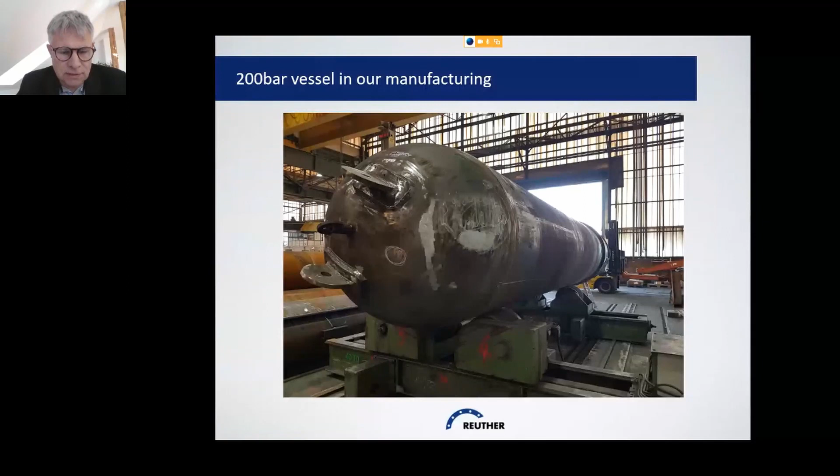We would like to sell such storage tanks to Australia. We can also produce such storage tanks for ships and other different applications. We produce storage tanks not only for hydrogen, but also for liquids, oxygen, nitrogen, and so on. We have a long history and long experience producing for the petrol industry and chemical industry - special storage tanks. But we are only a producer of storage tanks, towers, and mechanical parts.

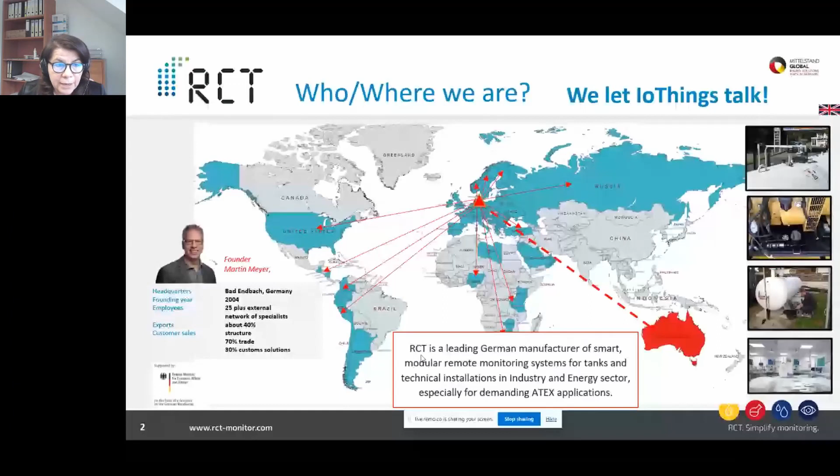Our control solutions have been designed as smart modular solutions that can be installed in any type of tanker for the liquid oil and gas industry, as well as for the power generation business and the chemical industry. We are precisely working in power and energy supplies.

So we control all the oil and gas industry, the tankers in the oil and gas industry. We have also entered the pharmaceutical industry, supporting our Merck company in a partner project with them. We are also working on water, sewage, and water disposal. We have developed a project to monitor flooding in Berlin. We are as well in the administration business in municipalities. We are in house and building, and we are also working in logistics, containers, and transport.

So what are the areas we are in? We are in tank monitoring, meter monitoring, and object monitoring. So we not only supply the software, we also supply the hardware, starting from the sensors. We have developed all the types of sensors required for the gas industry and for any other application, partnering with any company in order to provide a solution to the customer.

Our major equipment is obviously our transmitters. We have developed plug and play solutions in order to monitor any levels, any objects, any movements, any alarms in the tankers, using the latest technology for transferring data—for example, cellular, LoRa, NB-IoT, Sigfox—to feed our data management system. We have also developed, with RCT, a specific mobile app and web app to provide the customer with the latest solutions for monitoring their systems.

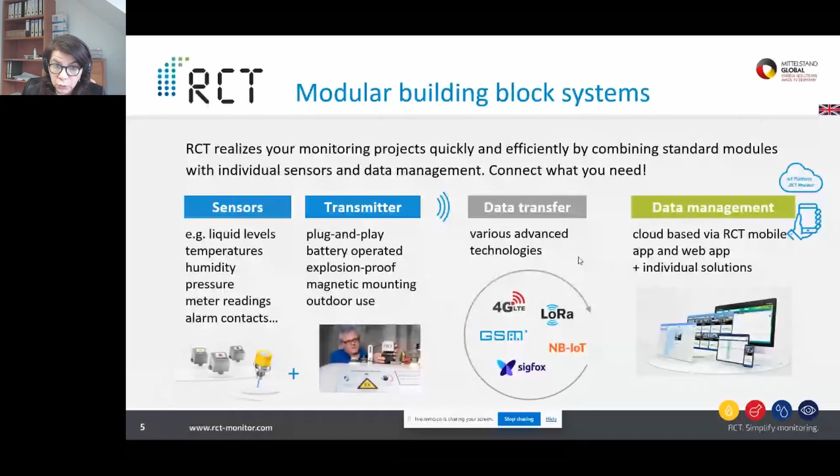As you can see in my slide, on the left-hand side is the hardware, and on the right-hand side is the picture of what our software looks like.

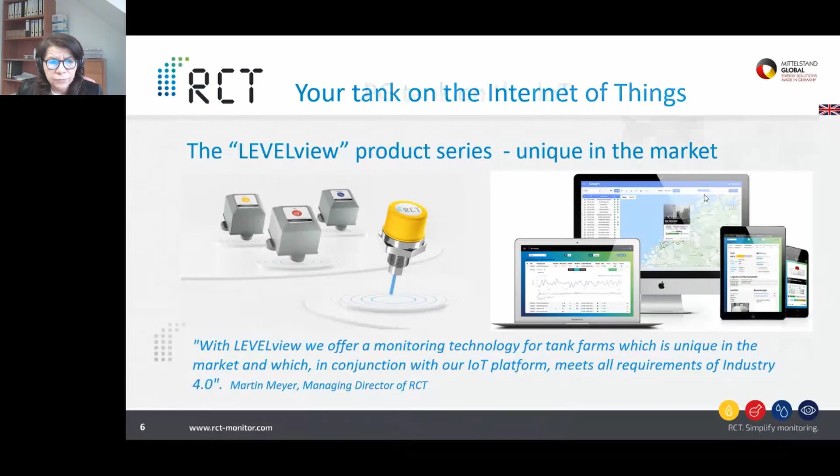As well as gas, we have developed systems for oil and water monitoring. In this case, as I said before, we are working on monitoring water for irrigation systems, as well as for flooding systems, and even water consumption in households.

We have also developed, as I said before, in the chemical industry with the company Merck, a system to provide monitoring of the barrels and containers. We also provided the logistics for their freight documents. This has been a joint venture development, and is obviously a huge step into the chemical industry.

As well, we have developed a system for monitoring the meters - the gas meters, the electricity meters, the water meters. We developed this system because today it's not only about supplying the electricity, it's also understanding the logistics, the consumption, and much more via the additional value added system like the monitoring systems.

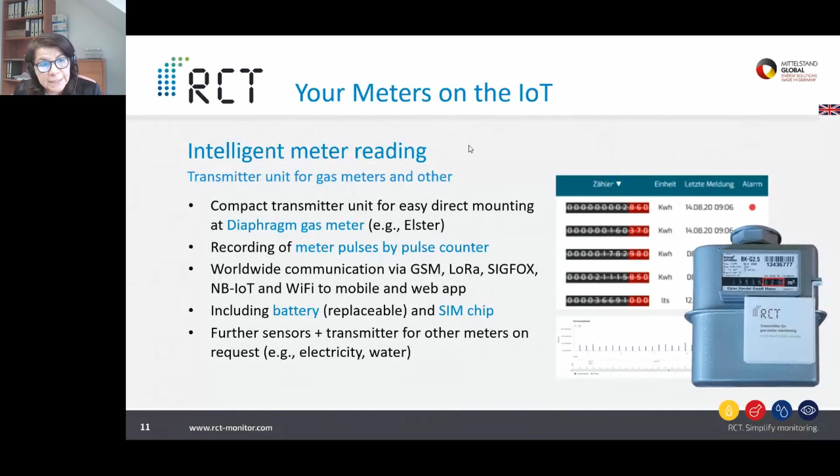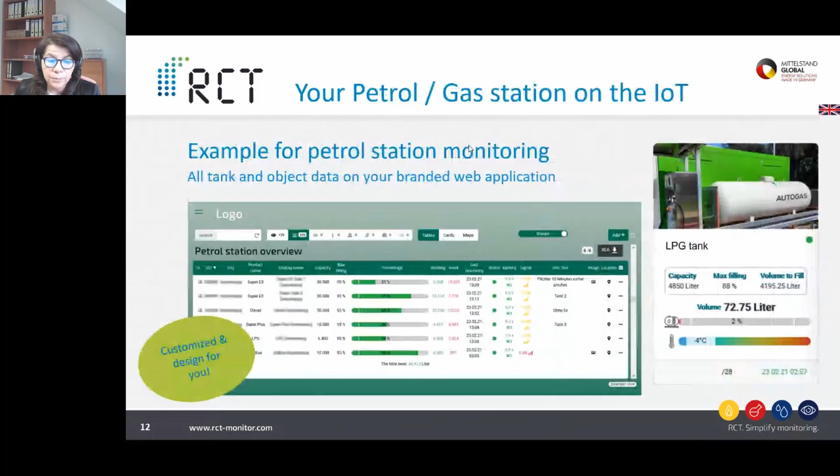We provide notifications and limits, low limit, high limit of the tankers. We provide information about the demand, so any company that provides fuel in the industry can monitor the consumption according to the area and analyze any future delivery of the products. We mainly partner with our customers to make sure they have the information they need in their apps or in their computer system.

Additional benefits from our remote control systems are that we provide warnings on the levels of the tankers. We optimize the route planning for the filling, exactly according to real demands. We reduce the driving distances because we monitor all the fuel levels, and obviously the local demand.

Everything is provided with high certifications. As you know, the oil and gas industry has very high demands in certifications, and we as a company provide the products with all certifications required for this business, for the oil and gas industry. So with this was my presentation. I look forward to hearing from you if you want further information about our remote monitoring solutions.